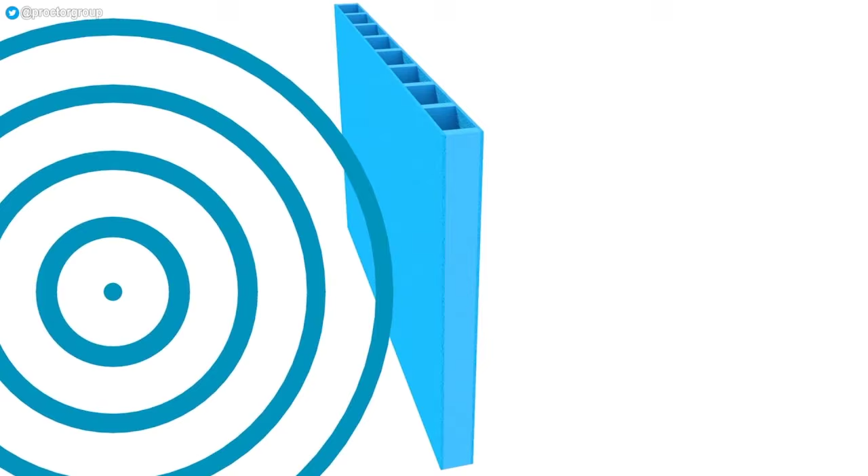This has the effect of reflecting a greater proportion of the incident sound waves, resulting in less sound being transferred into the structure. Heavy elements such as brick walls or concrete floor slabs are therefore better able to restrict the passage of sound, particularly those problematic low frequencies, than lighter timber frame structures. It is, however, not always practical or economically viable to use high-mass construction. This is particularly true in refurbishment projects, where increasing the mass is often impossible.

Stiffness. The stiffness of the structure is important as it dictates the ability of the structure to vibrate. While the mass of an element restricts the absorption of sound waves, the stiffness restricts their transfer once absorbed. The property governing this is the modulus of the element, in other words, the ratio of depth to length. A shallow and wide beam will vibrate more than a deep and narrow one, allowing for a greater amplitude of vibration and therefore more sound to be transferred.

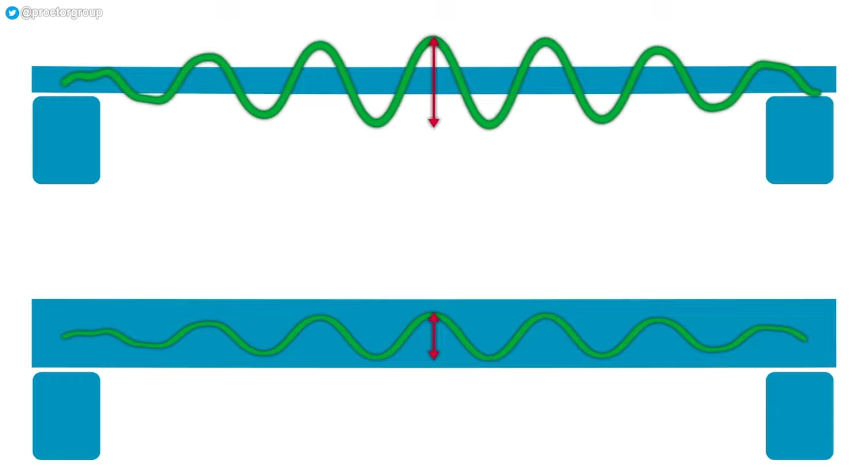A related property here is resonance. Every part of the structure will have a frequency at which it vibrates more readily. This is the natural or resonant frequency. If the natural frequency of, for example, a wall, coincides with a frequency in the incident sound, the effect may be able to amplify rather than reduce the sound. Careful consideration of the stiffness and frequency response is therefore necessary to avoid this.

Isolation. An effective way to prevent sound transmission through structures is by physically isolating one side from the other. This can be achieved by either using entirely separate structural elements, such as independent floor and ceiling joists, or by using resilient mountings for floor and ceiling surfaces.

This approach aims to break the pathway for sound to travel through the structure from one side to the other. With independent structures, there is an actual discontinuity in the pathway, leading to the best acoustic performance. However, this approach results in very thick wall or floor elements, so is not always practical, and as such tends to be used only when acoustic performance is the primary concern, such as in recording studios.

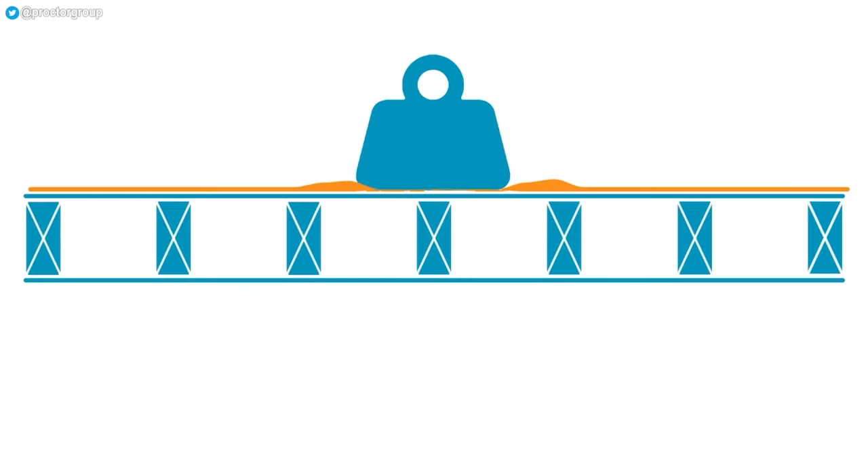Resilient layers are usually a cheaper, thinner and lighter weight solution. They can be applied in the form of floor deck or batten systems, as ceiling mounting bars, or commonly both. These work similarly to car suspension by damping the vibrations and reducing the energy from the sound waves by allowing a degree of movement. These systems must be carefully matched to the loadings expected on floors, as heavy weights can damage the layer and reduce their effectiveness.

Absorbency. Absorbent acoustic materials work by reducing the echoes within cavities in a wall or floor construction. This has the effect of breaking up the sound waves in these spaces. This reduces the overall energy transfer by converting the energy in the sound waves into heat due to friction between adjacent fibres. Fibrous materials such as mineral or polyester wools are usually used for this purpose, most commonly in timber or steel frame structures. If there are voids present, partially filling them with an absorbent material will generally help reduce the sound transfer.

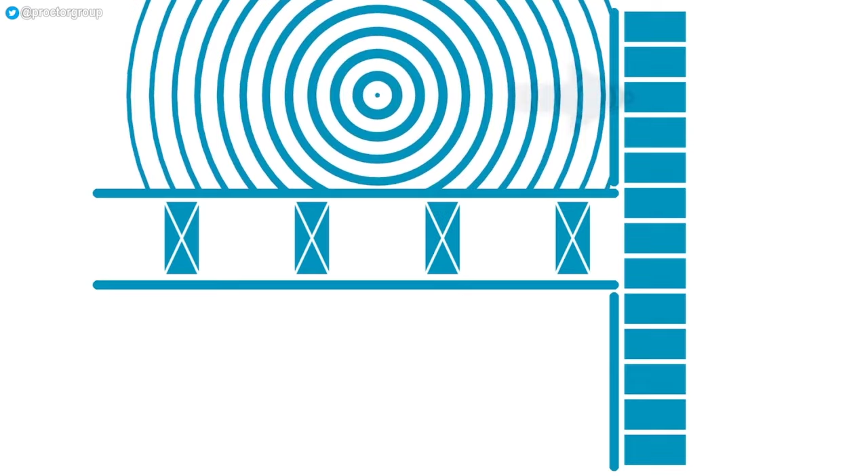Flanking. Flanking transmission occurs when sound can pass around the sides of an element, for example, bypassing a floor construction by passing through the walls instead. This can result in elements with well-designed and specific acoustic insulation failing to perform as well as intended. Flanking transmission can be minimised by paying attention to how linkages between floors and the supporting walls are designed. However, outside of new build constructions, this can be difficult to achieve.

It's therefore not uncommon in refurbishment projects to over-specify the acoustic insulation to account for the unknown quantity of flanking transmission. Acoustic floating floor systems will typically use a strip of foam at all perimeters to prevent a physical contact between the walked-on surface and the surrounding structure.

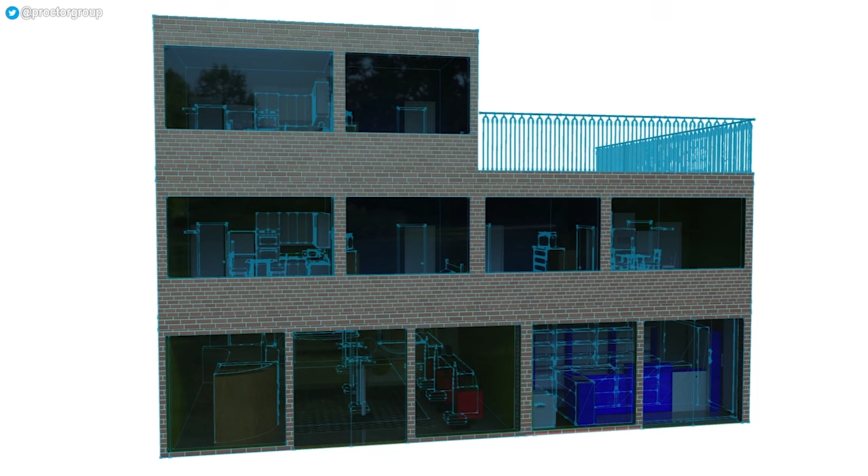Building regulations. The building regulations for acoustics have remained relatively stable since the mid-2000s. The precise details vary across the UK, with slightly different variations used in England, Wales, Scotland and Northern Ireland, but there's a lot in common which we will consider here. The regulations set requirements for impact and/or airborne sound transmission across separating walls between adjacent properties, and for airborne sound only within a single dwelling.

Between dwellings, floors are required to resist both impact and airborne sound, and walls to resist only airborne sound. Between dwellings and commercial properties, such as shops or offices, only airborne sound insulation is required. Where a roof terrace or balcony is over a dwelling, impact sound insulation is required. These requirements are expressed by way of a single figure value, which combines the sound levels across the full spectrum of frequencies into a single number.

Depending on the regional variations across the UK, this can be weighted to emphasise different frequencies or make the requirement more or less stringent. In general, though, acoustic requirements are expressed in terms of decibels, dB, of reduction in sound pressure. For airborne sound, this is expressed as dB DnT,w, with a higher single figure value indicating better acoustic performance. For impact sound, dB L'nT,w is used, with a lower number indicating better performance.

The requirements are reduced slightly for refurbishment and conversion projects to reflect the practicalities of introducing acoustic insulation into an existing structure. This can include period features that are listed or unknown existing details or defects that cannot be easily remedied. These single-figure values do not vary linearly with perceived loudness. A change of 10 dB in the acoustic performance equates to a doubling or halving of the perceived loudness. This makes the scale used very sensitive, but it also makes it difficult for the human ear to detect subtle variations in acoustic performance.

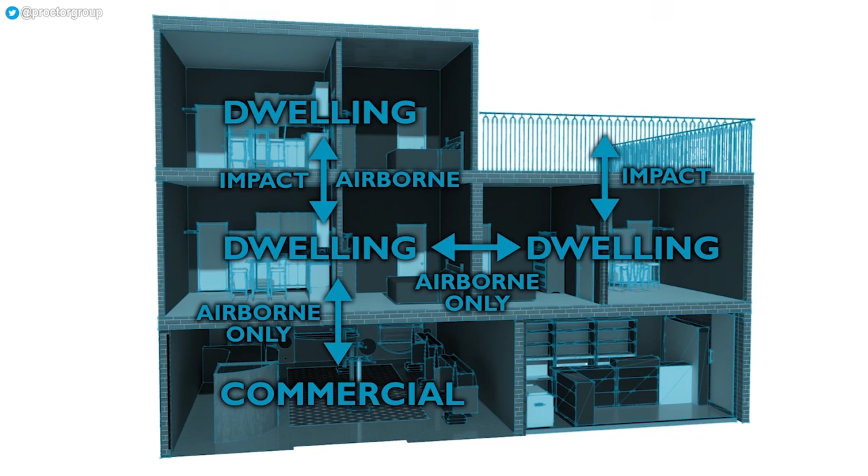Testing and compliance. Because of the difficulty in accurate perception by the human ear, an important aspect of the regulations is a mechanism to ensure compliance. Again, the specifics of this differ between the various parts of the UK, but pre-completion testing of at least some proportion of separating walls and floors features across the country. Acoustic testing is a complex process and should only be undertaken by those appropriately accredited by organisations such as the United Kingdom Accreditation Service, UKAS, or registered with the Association of Noise Consultants.

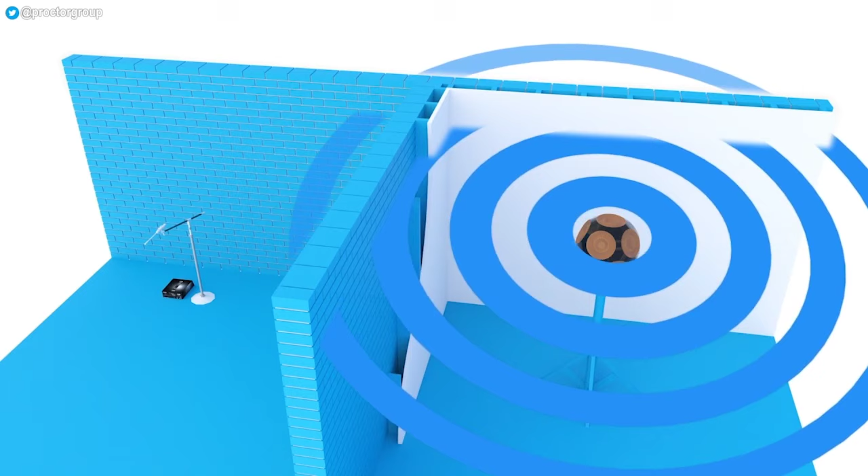Testing for airborne sound is typically done using an omnidirectional speaker to play a predefined pattern of noise which can be measured by sensitive microphones and sound meters in adjacent rooms. The figure quoted is the difference in sound levels across the partition, so a higher figure is better. The sound source used is usually pink noise, which has an equal power per octave, giving more weight to low frequencies than white noise, which more evenly distributes sound power. This shift in frequency is quite noticeable when the two colours of noise are played back to back.

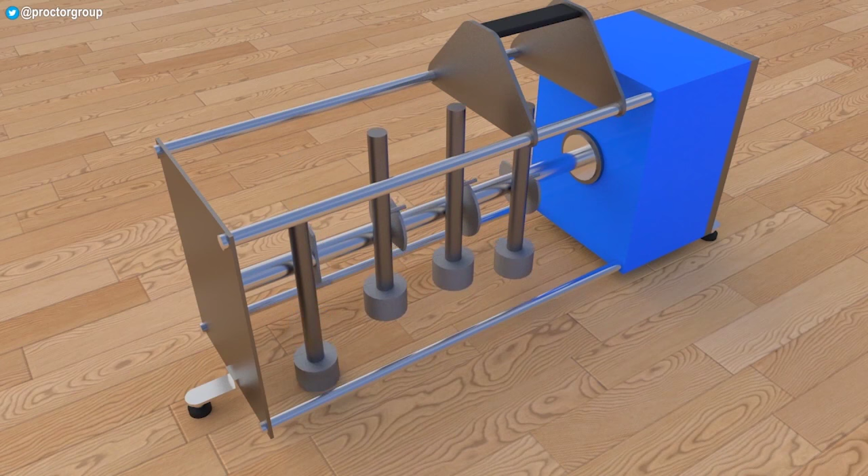Impact sound is measured using a tapping machine to simulate footfall. Tapping machines use a camshaft to drop carefully calibrated weights in a precisely defined rhythm. This sound is then measured in the room on the other side of the separating floor. In the case of impact sound, only the level in the receiving room is measured, so a lower result indicates better performance, the opposite way around from airborne sound measurements.

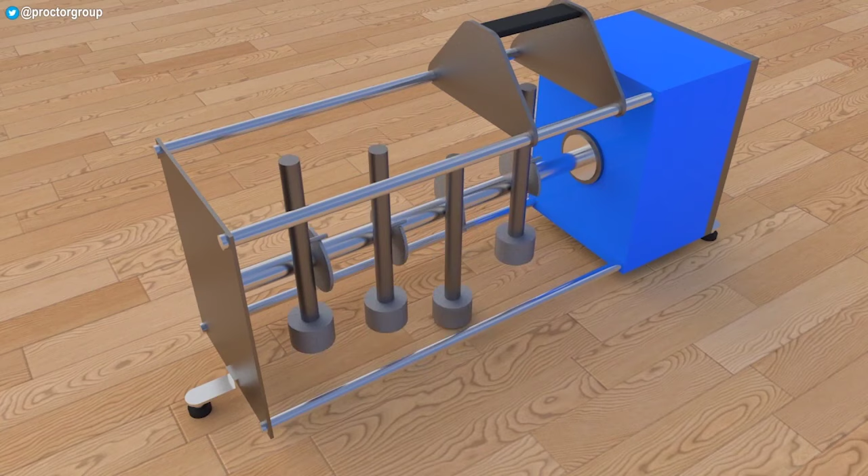The equipment used to measure this sound must be very sensitive, so during testing it's critical that certain site conditions are met. The building under test should be more or less complete, with doors and windows in place. A lot of noise can transfer through openings, so it's also important that vents and ducts are in place, or their openings are sealed.

Site noise should also be minimised during testing. Ideally, testing should be undertaken at night when no work is being done on site and noise from machinery and traffic will be minimised. Any extra noise from site work, etc., will lead to poor results or possibly even test failure, so it's in everyone's best interest to ensure the correct test procedure is followed.

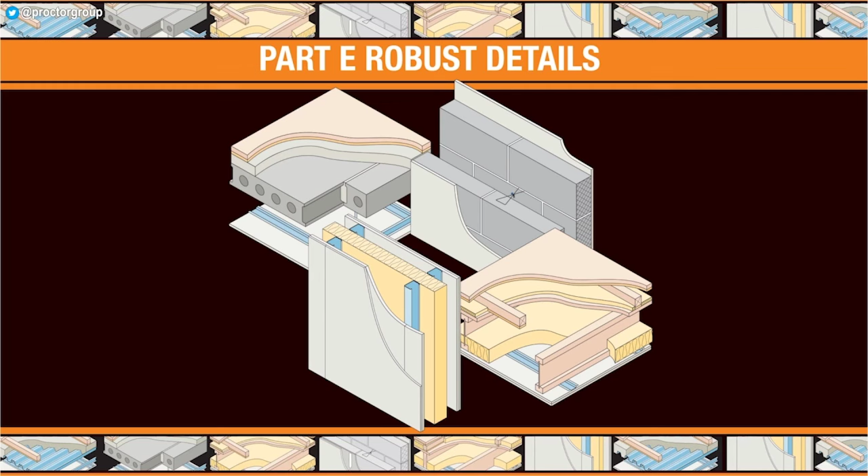As an alternative to testing, designers can use approved robust detail constructions to comply with building regulations. These are standardised subfloor types to which pre-approved floor and ceiling treatments can be applied. Because these construction types have been tested thoroughly ahead of time and have consistently exceeded the regulation requirements, they can be used without testing, provided they are followed to the letter.

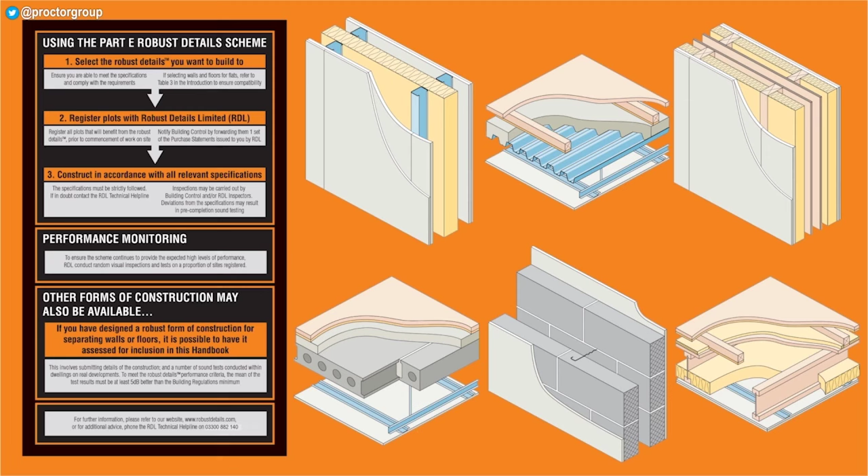The A. Proctor Group have floating floor treatments to suit most robust floor types, with a range of systems approved in floating floor treatment, FFT categories 1, 2, 3 and 5. As well as floor type and acoustic treatments, robust detail also includes standard details for the junctions and connections between walls and floors in order to minimise flanking transmission.

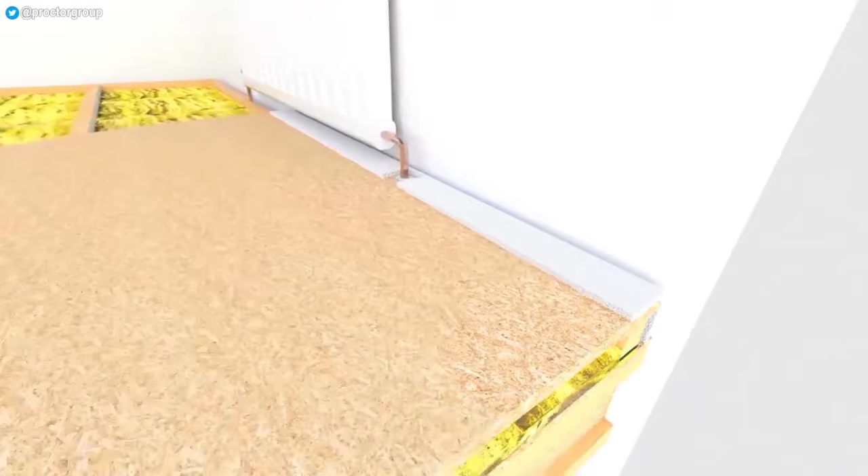Acoustic floor systems overview. There are two principal types of acoustic flooring systems and a few other less common ones. Batten systems. Batten systems such as ProFloor dynamic battens are most popular in new build timber frame floors and are the top performing floating system. The extra depth introduced between the battens not only simplifies service runs within the floor, but also provides additional void space in which additional fibre layers can be added to boost sound absorbency.

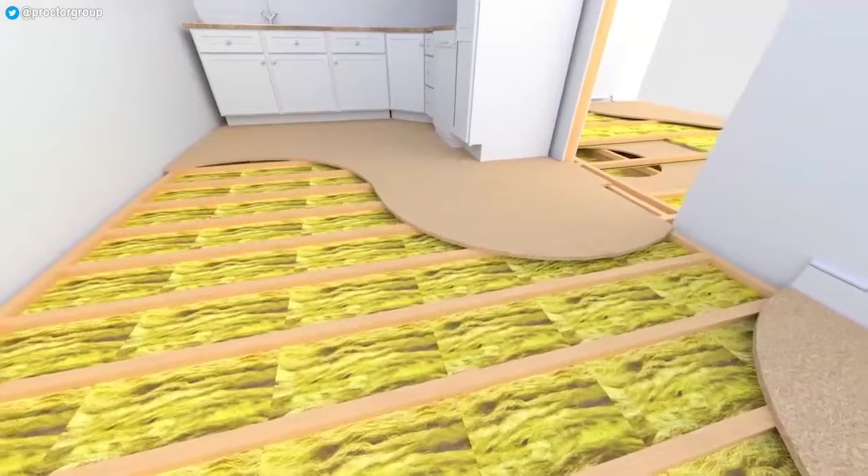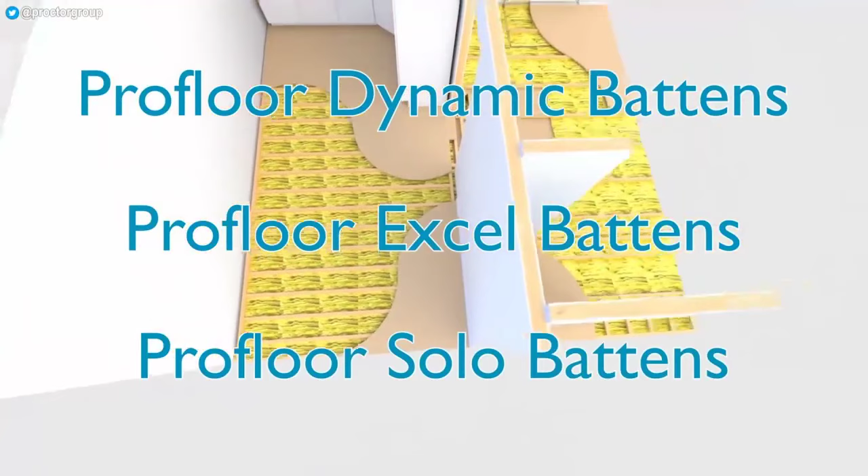The downside to batten systems is that they tend to be thicker, so it may not be practical to apply to all floors if tying into adjacent floor levels is an issue. The A. Proctor Group supplies a range of batten systems to cover a variety of different project requirements and floor types.

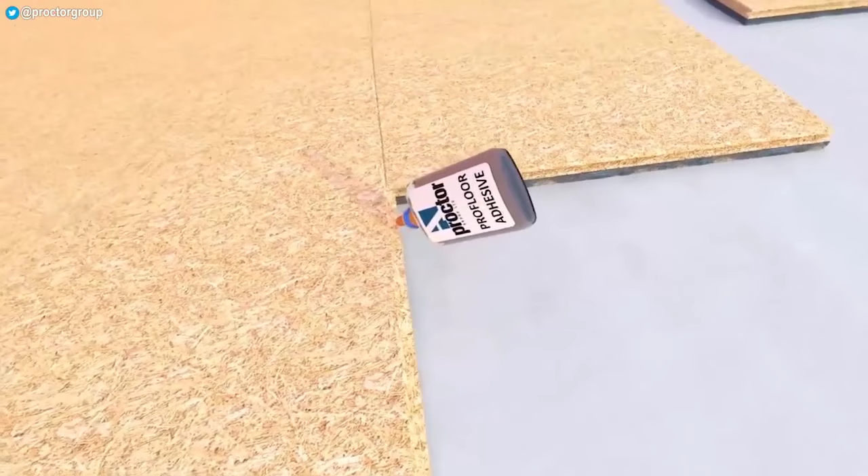Deck systems. Deck systems are much shallower and can provide a good boost to the impact sound performance of a floor. However, they offer little scope to improve the airborne performance. For that reason, they tend to be more commonly used on concrete floors, where base floor mass does most of the work dealing with the airborne noise transfer. Deck systems are also a good fit for refurbishment projects, where floor-to-ceiling height may limit the scope for using a batten system.

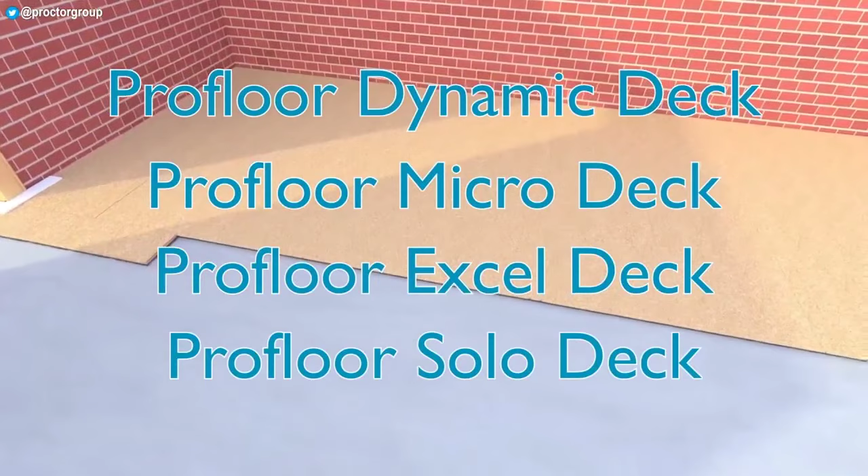Systems like the ProFloor Micro Deck at only 17mm can improve impact performance noticeably while having minimal effect on floor levels, services and internal trims and skirtings. The A. Proctor Group's range of overlay deck systems are designed to provide the optimum balance of performance and thickness while accounting for the practicalities of working within existing properties which may not have ideal access.

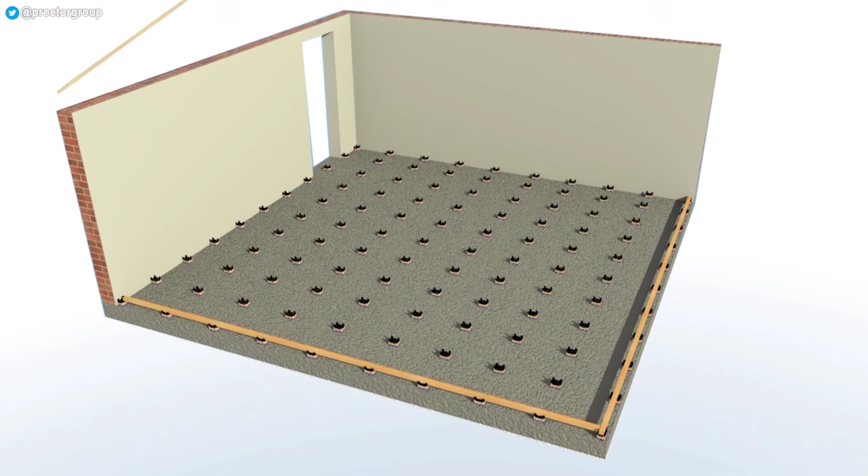Other systems. Of the less common systems, levelling systems allow a floor to be raised and levelled while introducing a degree of acoustic performance. This is useful in existing buildings where floors may be substantially off the level, or in new build where pre-stressed slabs may be used which have an inbuilt camber that can be corrected to give a smooth, level finished floor.

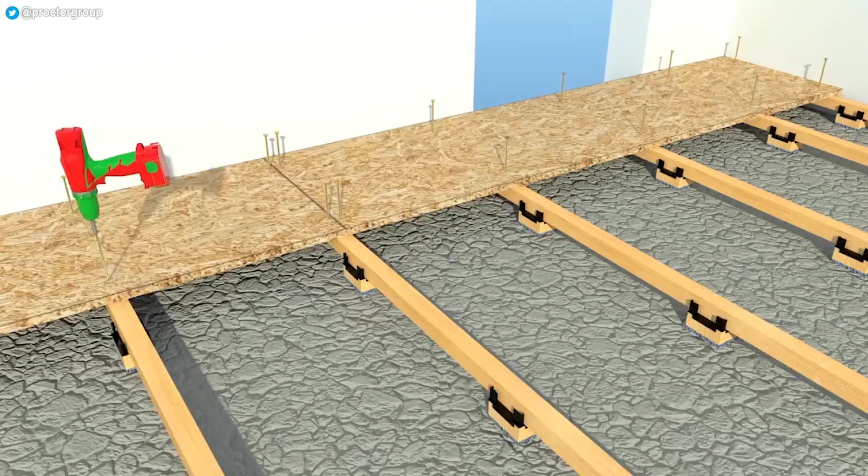The Proctor Group's ProFloor levelling system uses specifically designed resilient bases with packing pieces to accommodate variations in finished floor level from 51 to 203mm, while still delivering good impact and sound reduction. So that brings us to the end of the presentation, and we will now move on to the Q&A session.